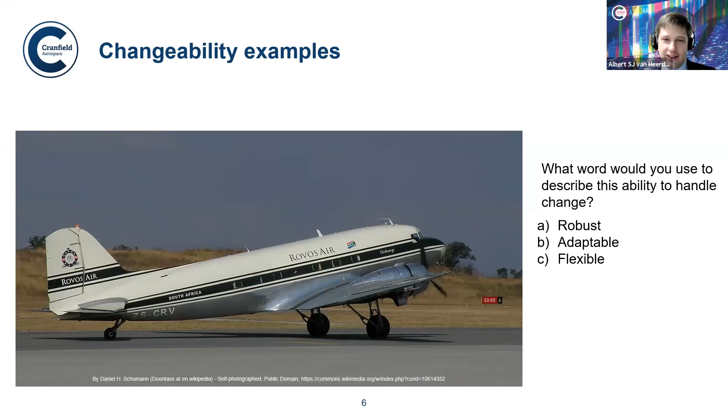Shall we say it's robust, adaptable, or flexible? I can see the numbers - adaptable looks like the preferable one. Well, you're all wrong. Actually, it's all of those terms - you can call it whatever you want. So you're actually all correct, I should put it rather that way.

A term we often use for this, where the aeroplane itself doesn't change or doesn't change much, is robust. It just absorbs changes as it goes on without being changed. There are very few examples of aircraft or engineering systems like this that just don't need to be changed, and this is simply because it's a well-designed, almost over-designed airplane that just simply does what it does, which is to transport things.

I'm going to go to the next changeability example. I'm going to use the words flexibility and adaptability a lot, just because, as I said, essentially you can use whatever words you want. Some words just naturally seem to fit the examples better than others.

So for example, you guys all chose adaptability - I would also probably have called it adaptable. In the literature we often refer to that as robust, but again, it wouldn't be consistent. But flexibility, most authors use when a change is made onto the system - from outside the system boundary, you make a change to the system. Whereas adaptability is more when the system changes itself. And robust is just, it doesn't need to change.

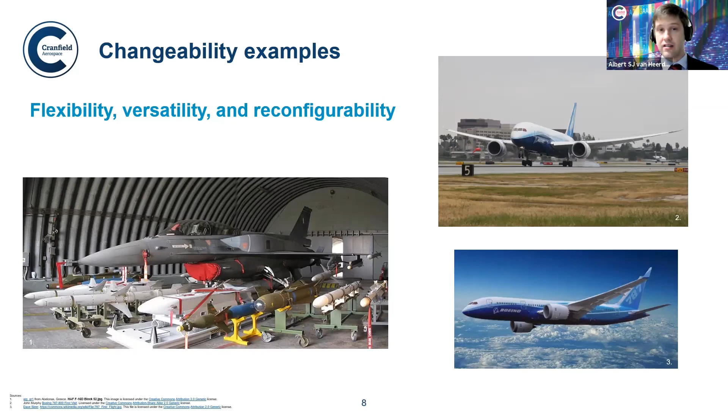Now, I often wouldn't consider this a life cycle property, because this has to do with the performance of the aircraft; it's something separate. For me, a life cycle property is usually something that has to do with what happens between missions. But many authors do consider that a life cycle property.

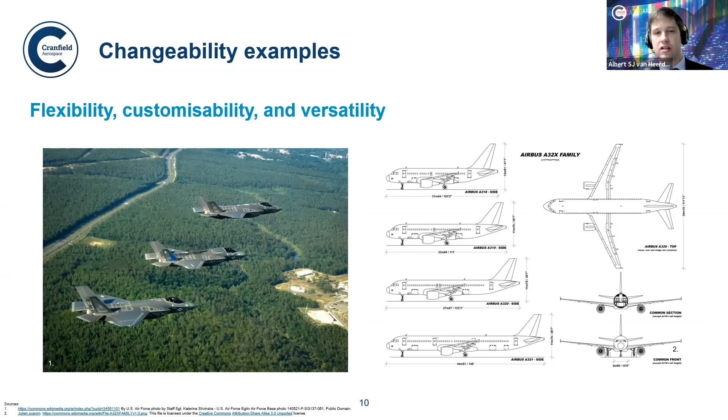This allows the Air Force or the services to keep maintenance costs and acquisition costs low, but still carry out these different types of missions or meet the different requirements of the forces. A very common example on the airliner side is what we call stretching the fuselage. You put in plugs to lengthen the fuselage. That's a common way of increasing payload, often at the expense of range, but not necessarily. I'll go into a bit more detail on that.

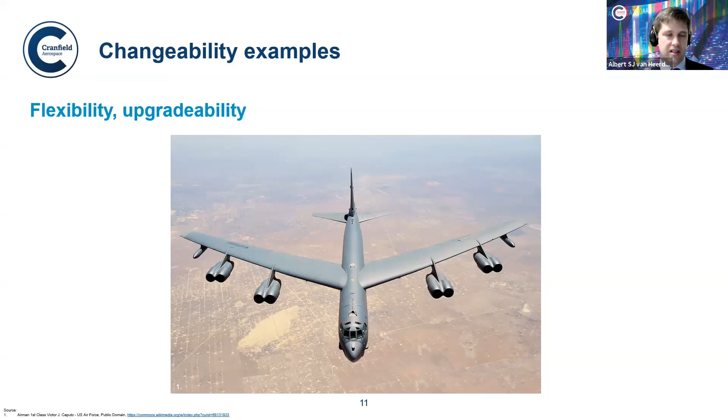Upgradability. A good example is the B-52 bomber, an aircraft that's been in service for a very long time, since the early 50s. It has seen extensive upgrades, not propulsion-wise, which is interesting, but in systems, the types of missions it can carry out, and the types of weapons it can carry. This is also a good example of over-design. The wing here is enormous, very high aspect ratio, very low wing loading, so a very large wing that allows all these changes to be made. You've got a lot of space and extra weight capacity that lets you make these changes.

Now I'm going to do another poll. If we've got pictures like this, the F-18 with different variants over time, and the Boeing 737 with different variants, and my little picture there, what word would you use to describe this ability to handle change? Now this is a trick question: is it adaptable, versatile, or evolvable?

Okay, it's spread pretty evenly. I shouldn't have said it's a trick question, I made it a trick question by saying it's a trick question. This is what we really refer to as evolvability, and the distinguishing factor is that there's this element of time, and the design that changes over time.

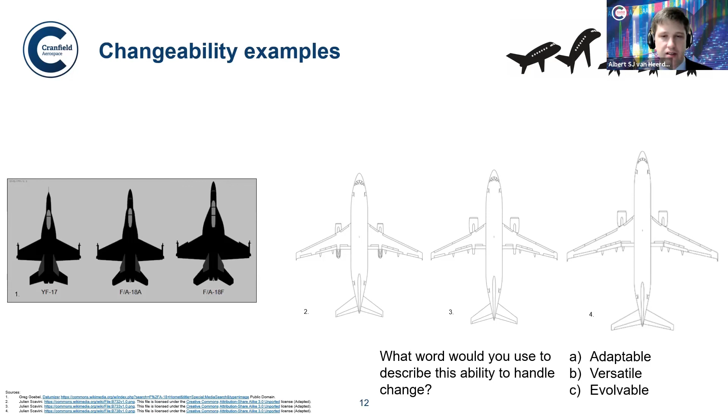I'm going to go into a bit more detail on how we recognize what we call evolvability. You wouldn't be wrong if you said the design was adaptable or versatile - it's just the language we use. People use it confusingly when they talk about it. I prefer the term evolvable because it's got some distinguishing features.

A definition for evolvability, this comes from a well-known MIT professor, Olivier de Weck, which defines evolvability as follows: it's the extent to which a design can be inherited and changed across generations or over time.

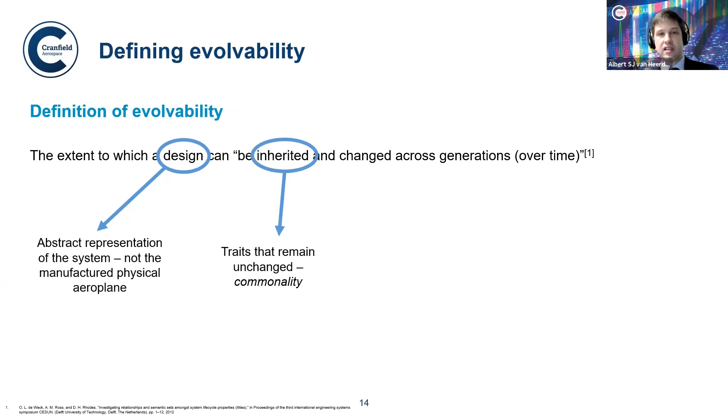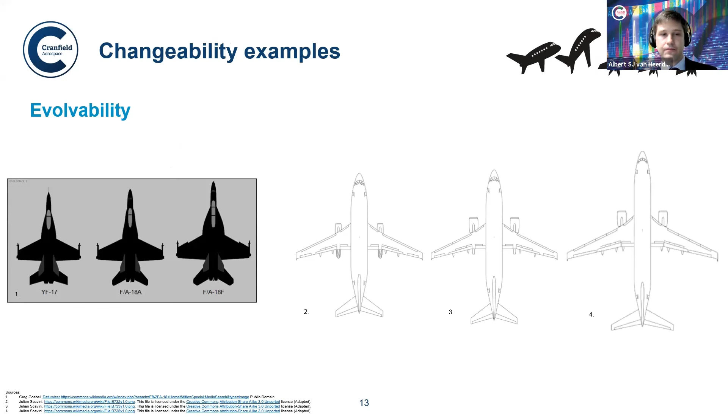Inherited means that there are traits that remain common across versions - certain things we see over and over again. If we look at this picture, you can see that they still look the same. They might be bigger or stretched, but there are things that are common. Inherit means that there are traits that continue far into the future, and with the Boeing 737, we still see traits that are essentially 60 years old, 80 years old.

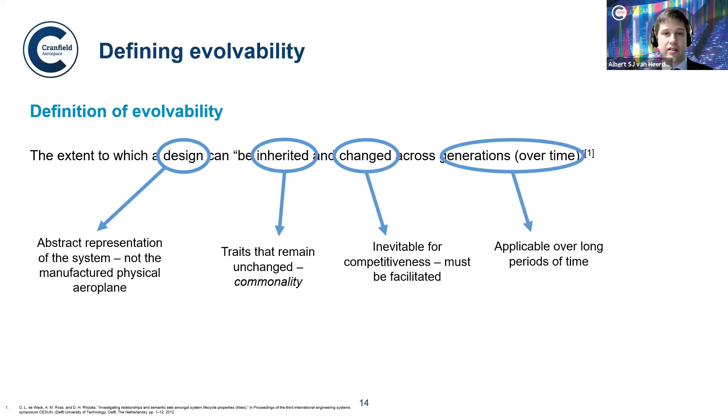Changed means that something about the design has changed, and it's going to be inevitable - you're going to have to change something about the aeroplane eventually, usually, to remain competitive. Generations, so usually this phenomenon occurs over very long periods of time. So that's the definition of evolvability.

There are a few obvious benefits. The first is that it's not a benefit, it's necessary - you're going to have to change your design whether you plan to or not. It's going to have to happen if you want to survive. How easy it is to change your design is going to depend on whether you survive as a company or not. It decreases risks if you have an evolvable design. It lowers development cost and time, but only for your derivatives, not for the initial one. It makes the manufacturer more nimble, able to respond more quickly to changes in the market.

And the airlines also benefit from this commonality that you get, so the traits that are common. Often we can reduce training and things for derivatives - for example, we can reduce pilot training and so forth.

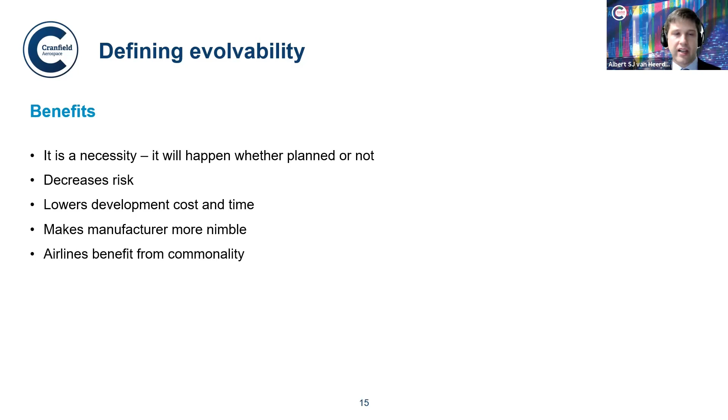But why is it difficult to design for evolvability? There are many, many reasons. The first major one is uncertainty - this is what we don't know. It's all about the future. The future is uncertain, we don't know where technology is going to go, we don't know how the socioeconomic environment is going to change, we don't know what the competitor is going to do. So we don't really know what changes we need to cater for. A very big part of designing for evolvability is to try to think about the most likely outcomes and then trying to prepare for those changes.

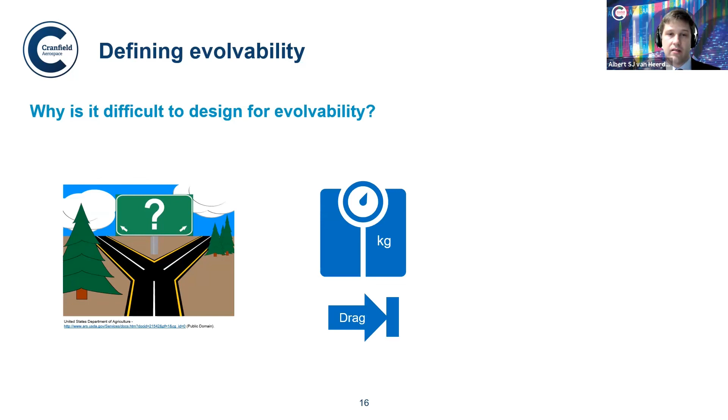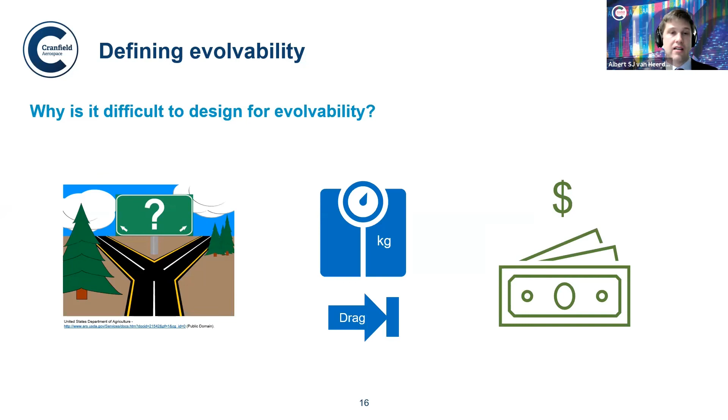The second one is that we've talked a bit about over-design, so having extra margin or what we call excess in the design, such as having a bigger wing. This adds mass and drag unnecessarily, which affects the performance and can affect the competitiveness of your aeroplane. Related to that, a larger aircraft is usually more expensive, or you could spend more money trying to reduce the mass and other things to make your design more evolvable.

I'm going to do a little demonstration to explain the thinking behind evolvability. I've got a two-axis graph here: utility versus cost. Utility is something that measures how good the design is - it combines a lot of factors usually. You could put fuel burn in there and noise, for example, NOx emissions. You can combine all of these things. You can even include passenger comfort or a lot of different things. So it measures how good your design is.

Cost here could again be anything - it could be your development cost, or it could be the total life cycle cost. The only important thing is that you shouldn't double account. So you shouldn't, for example, account for fuel burn as direct operating cost in the cost axis and also include fuel burn in the utility. You just need to be careful when you account for things.

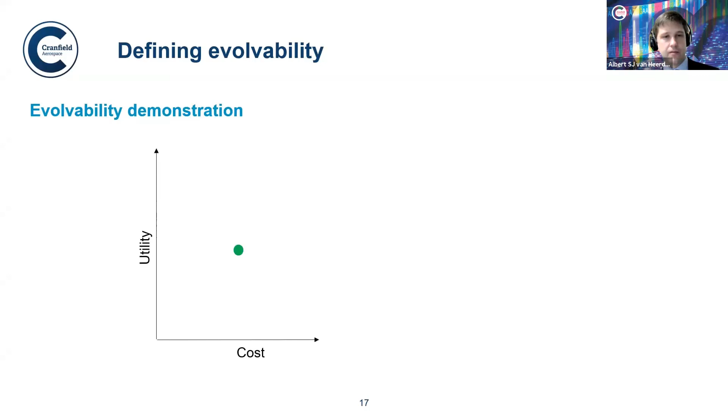A dot in this graph represents a single design - this design has some utility and some cost. You can think of this graph as a point in time, an era, or a scenario. We can then have a future scenario, which we'll call epoch 2 in this case. So we've got epoch 1 and epoch 2, and remember, you can have many different scenarios in the future, so you can have multiple epoch 2s.

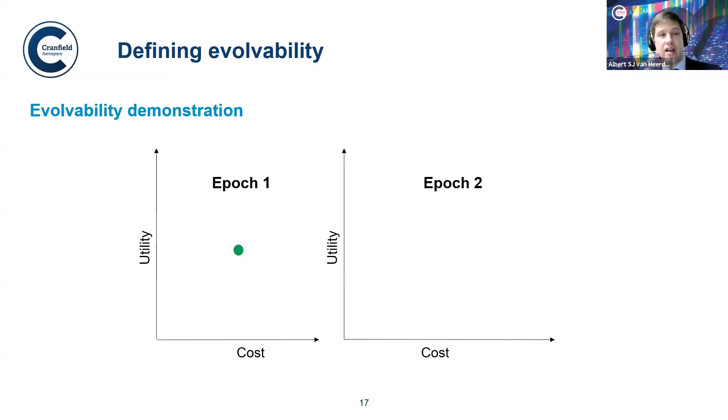Often when you design, your epoch 1 will be when the aircraft first enters into service, which could be 10 years from now, and then epoch 2 is beyond that. So you can have several scenarios for both epoch 1 and epoch 2. It's just important to keep that in mind.

So you've designed your little aeroplane and it's got some utility and cost, but then when you go to the future, you could completely reuse that design, so you don't do any redesign or changes. Now, probably the utility will be lower because it would be less efficient than new designs and so forth. It wouldn't be as competitive. However, it'd be cheap to do it because there's no extra development time or cost, and the only cost would be the recurring cost, which would be your manufacturing cost.

The other option is to design a new aeroplane, so completely new aircraft. This would have high utility, but also high cost because of the long development time and cost. The other option is then to take your aircraft and just make changes to it. So often you wouldn't quite be able to be as competitive as a brand new design, but there'll be less cost and time spent to develop it.

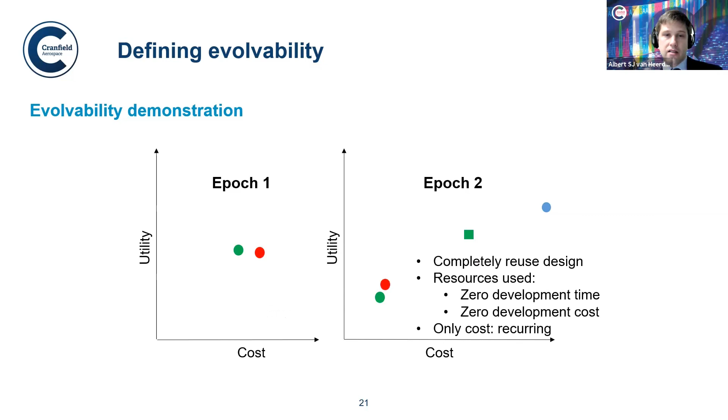Now, the idea with designing for evolvability is to design for change from the beginning, which will often come at a slight expense in utility and also more cost. So you could reuse that design as well, but what you would like to exploit now is that you've evolved that design at far lower cost.

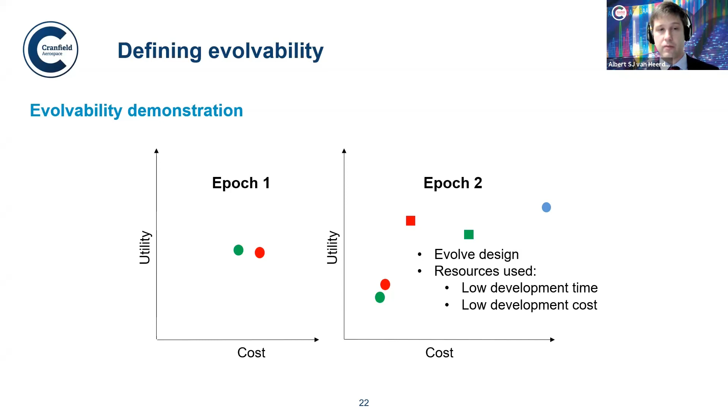Now, in the early days of civil jet transport, the green design was often the case. It wasn't really planned or wasn't planned extensively enough, whereas nowadays evolvability is planned quite extensively, and my work is very much about helping that process, helping designers to do it faster. So I'm going to go quickly through a few examples of evolvability in aircraft.

So I talked about the 367-80. This was an aircraft that Boeing built primarily for the purpose to test ideas for jet transport. And it eventually developed into the KC-135, which you also think of as a Boeing 707, but it's actually a different aircraft. And then the Boeing 707.

Now, from the -80, the fuselage diameter increased for the KC-135 and again for the Boeing 707. Boeing didn't want to make this change, but in response to McDonnell Douglas, which introduced 6 abreast seating, they had to be competitive. The 707 also received extensive upgrades to its wing in very quick succession. So there were many variants, and it was a design that evolved very quickly and a lot. And eventually, some of the design features went on to the Boeing 727.

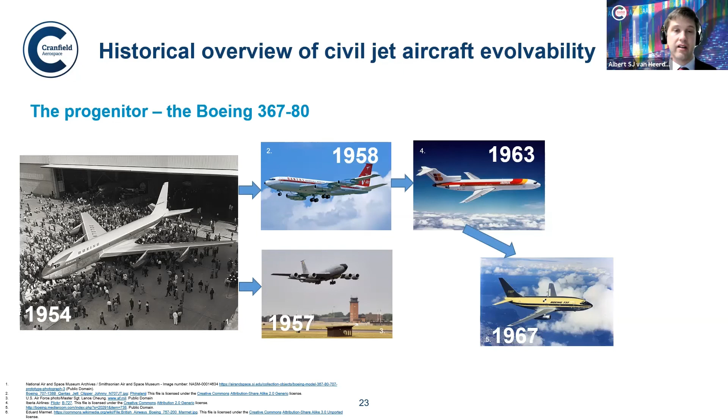So there are actually a top cross-section and a bottom cross-section when you look at the fuselage. And on the 727, the top section was reused, whereas the bottom section was made smaller. The 727 eventually, design segments from that were used on the 737, which itself is going to be the next slide, which received extensive evolution. The 727, actually exactly the same fuselage cross-section, was also used on the Boeing 757.

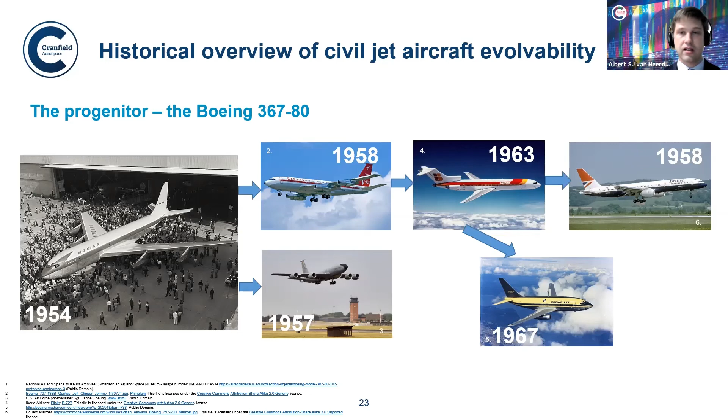So the Boeing 737 is an interesting example because it started off with low bypass turbofans. So you can see the engine there, the nacelle has got a very small diameter. When new technology became available with the CFM56 engine, the high bypass ratio, or what we call medium bypass ratio, the larger fan diameter, there was a big problem with landing gear space.

And changing the landing gear essentially means changing the wing. And changing the wing for an aircraft is essentially a redesign. It's a very significant design exercise to make changes to the wing. So with this next generation of 737, what's called now the Classic, the original was called the Original, and then we went to the Classic.

What they had to do was put the engine further forward and upwards, and that actually was only made possible by the advent of computational fluid dynamics, and extensive study to make that change happen without changing the landing gear. Then we went to the next generation, the 737NG.

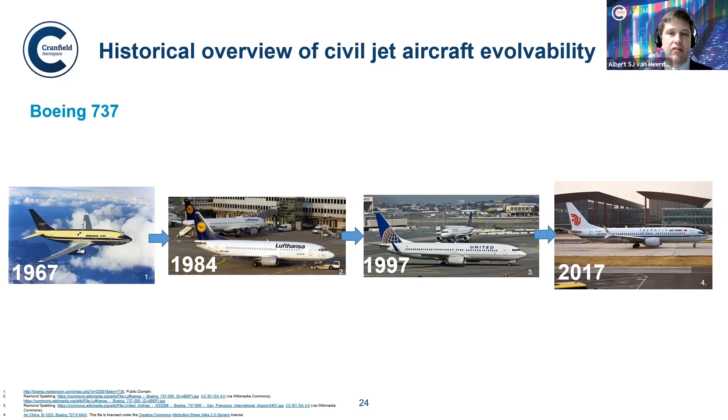Then we went on to the MAX, which with the LEAP engine is again a bigger engine. So again, a big challenge in integrating that with the airframe. And actually for the longer versions of the MAX, there's a mechanism in the landing gear which effectively increases your landing gear length during takeoff to allow you to still rotate.

Probably the best example of an aircraft that was designed with evolvability very much in mind is the Airbus A300, the original Airbus. This aircraft was designed with excess volume, so you could increase the range significantly, ample wing area and landing gear length. The landing gear length was so long that you could increase passenger capacity by 25% without changing anything about the landing gear.

The airframe was also designed such that you could increase the maximum takeoff weight significantly with only minor structural changes. In fact, the aircraft's range went from 1,200 nautical miles, I think, up to 4,400 nautical miles without any major noticeable geometric changes to the wing. And the maximum takeoff weight went from, I think, 130 tons to almost 170 tons. So a very, very amazingly evolvable aircraft.

Another thing I should say is that many versions were studied from the outset. Even before the aircraft was introduced into service or manufactured, many derivatives were studied. One of these was the B10, which later became the Airbus A310, which is actually a shortened version. The interesting thing about this aircraft is that the wing chord was reduced.

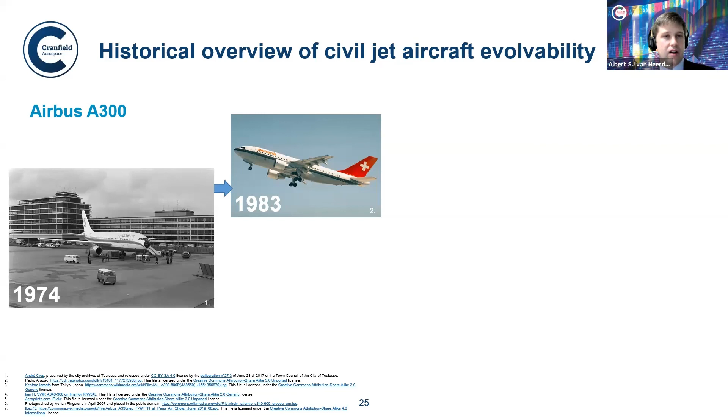They could therefore use the same structural layout and many of the same structural characteristics, but the aerodynamics was completely new. And it also took some new understanding of transonic aerodynamics to make that possible. It's the only example that I can find where a wing was shrunk like this. It's a very, very interesting example.

These collectively changed into the Airbus A300-600, which was the last, highest gross mass variant of the Airbus with a very long range. So essentially a completely different aircraft from the original, but looking almost exactly the same. These designs were changed into the A340 and A330. The A340 design was eventually upgraded to the A340-600, which has an extended wing.

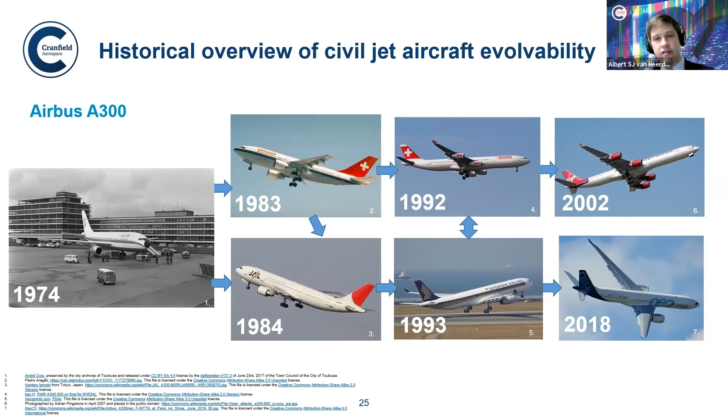The wing chord was increased with a wedge increase and a tip. This is a very extensive redesign exercise, although it's not a new wing. The decision was made that changing the existing wing is better than incurring the cost of a brand new wing, even though it might be less efficient. And of course Airbus had so much confidence in the A330 design that it received new engines in the A330neo, plus changes to the wing.

Arturo, I don't have the time displayed on my computer. I don't think we've got that much time left. Yeah, about 15 minutes left.

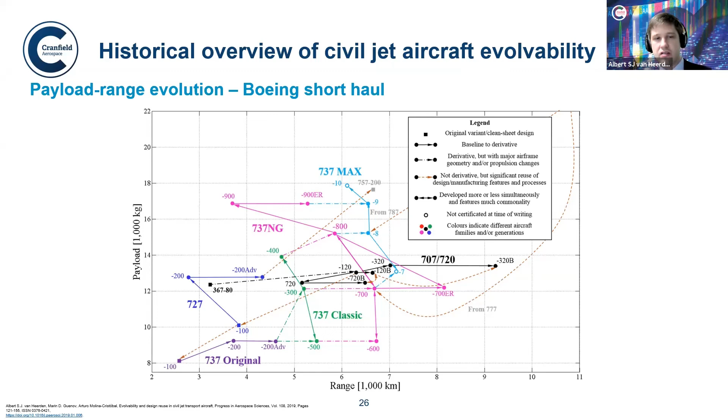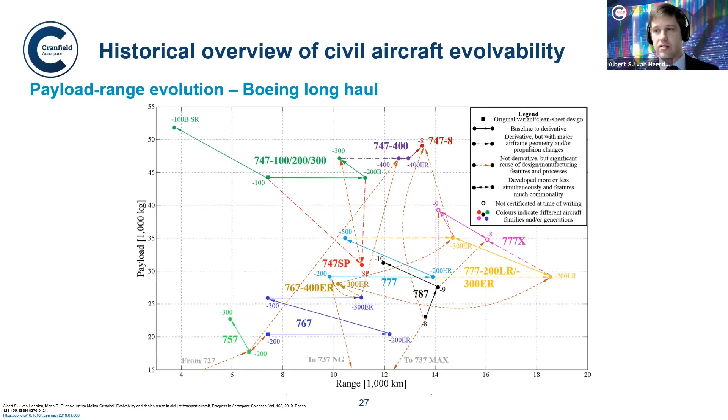They introduce a version, then make it more efficient to extend the range but keep the payload the same, and then stretch it with the same new technologies. Once they've got that, they try to increase efficiency again to extend the range of the larger version. This was done extensively with the 777 as well, which went up to the 300ER version. They extended that as far as they could, but eventually had to make major changes with the 777X, which has a new wing design.

Airbus follows a more typical leap and branch version. With the A300 you can see the extensive increase in range without a big increase in payload.

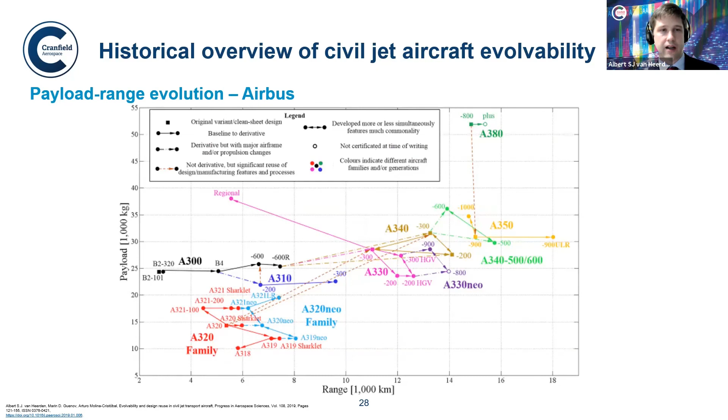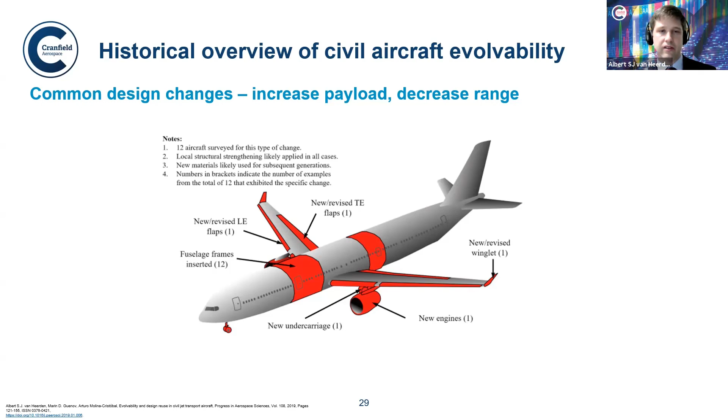Now, how does this physically look? So if you want to increase payload, decrease range, these are images that I produced based on a survey of several aircraft and what the most common changes are. So obviously, as you would expect, you increase the fuselage length by adding plugs. Sometimes new engines, but not always. And sometimes with heavier versions, you fiddle a bit with the high lift devices.

If you want to maintain payload and increase range, sometimes you're going to have to increase the wing area. That's for wing loading, but also to have more volume for fuel. And often extra fuel tanks are added in the fuselage to increase the range. Sometimes wingtip extensions and so forth you see as well.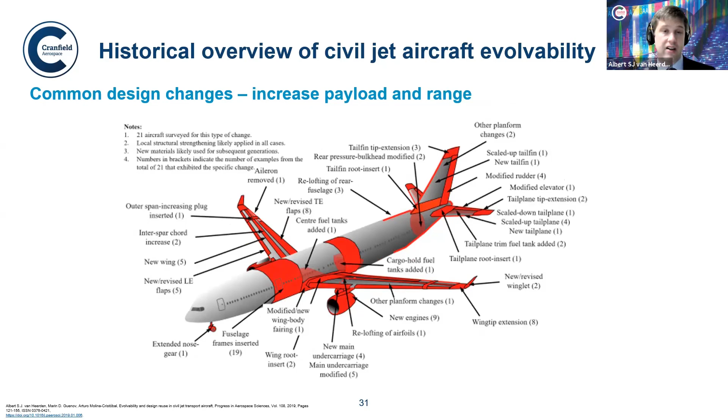If you want to increase both payload and range, you're going to stretch and you're going to probably increase the wing, but not necessarily, as we see could be achieved if you've designed with enough margin from the beginning.

A more rare example is decreasing the payload, which we saw with the A310, and increasing range. This is often a more difficult change to do if you want to do it well, because you want to decrease the wing area essentially. And that's very expensive to do. So it's often a more difficult thing to do. You're also going to usually increase your stabilizers for stability purposes.

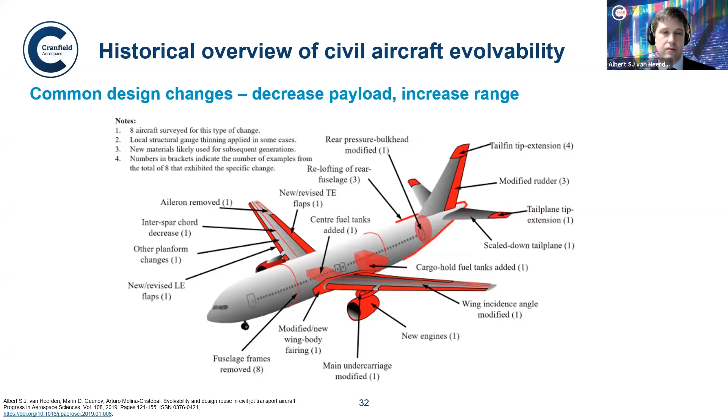So what are the lessons we can learn from these? It's important to have some sort of a strategy. So it's important to plan for evolvability. So either the leap and branch or Z or some other strategy. Leave margin in the volume, wing area, landing gear length and strength. This is very important, but it's very difficult to decide how much.

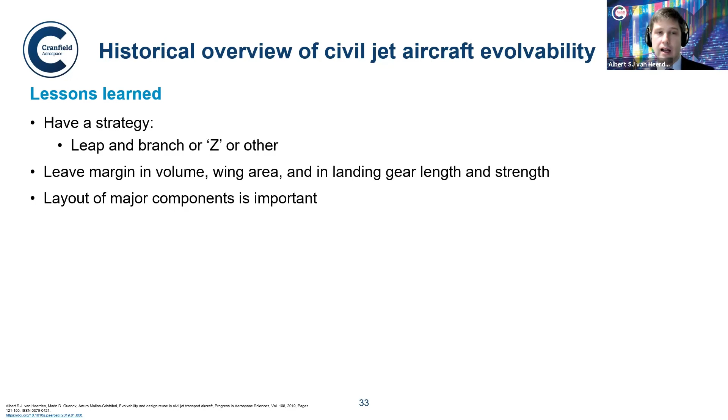The layout of the major components is important. So having engines under the wing allows you to more easily stretch the fuselage than having them at the back with the tail. There are several reasons for that. So the tube and wing plus podded engines under the wing is better.

Structural strengthening is reasonably easy compared to big changes in geometry, especially with the wing. And smaller derivatives are usually more difficult to change. And there are also multiple ways of achieving a change. So you don't necessarily have to stretch the fuselage. You can internally change bulkhead spaces, but you have to have prepared for that change.

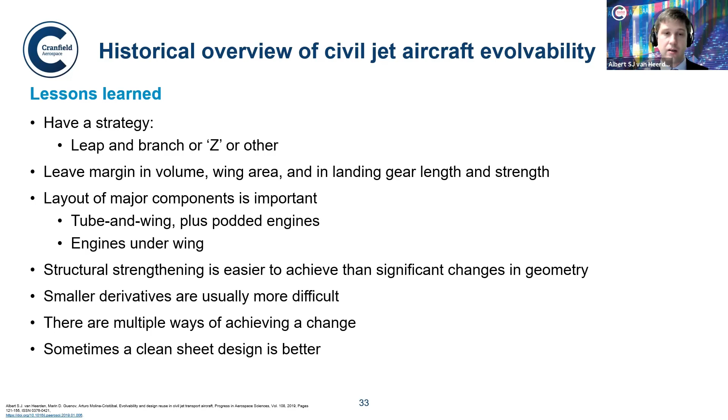Sometimes a clean sheet design is just better. So it's not necessarily that you should evolve an existing design. You should study also whether a new one is going to be better. Now, I quickly want to go through the evolvability framework, and I think we're going to run out of time now.

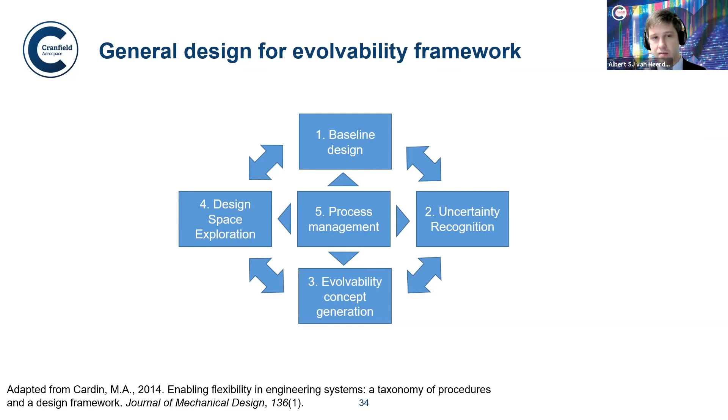This is a process which I adapted from Michel Cardin, who was actually at the National University of Singapore for a while. He studied flexibility of engineering systems in general in quite a bit of detail. What you have is a baseline design. So you have to start with something. Then you account for uncertainty by doing scenario studies and so forth. You generate concepts for evolvability and do design space exploration. I'm going to go through these steps very briefly.

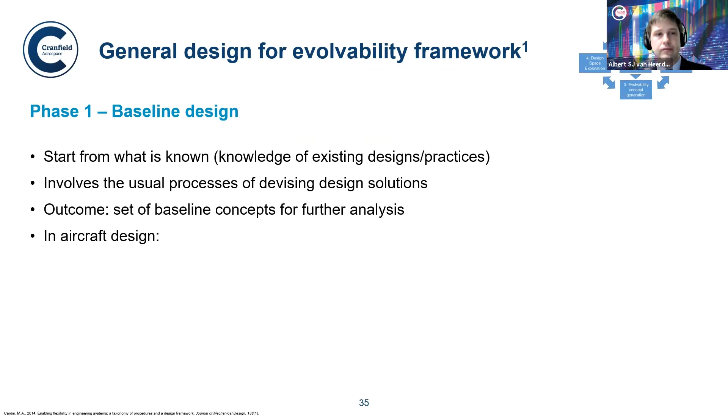So with the baseline design, you design essentially for your current requirements. And it's the normal process we learn in aircraft design. With uncertainty recognition, you want to capture and quantify the effects of the changing world on the system over time. So the questions you want to ask are, who are the stakeholders and how will their needs change? How will the changing world change requirements? What technologies will become available in the future and which ones should you prioritize? And what will the competition do?

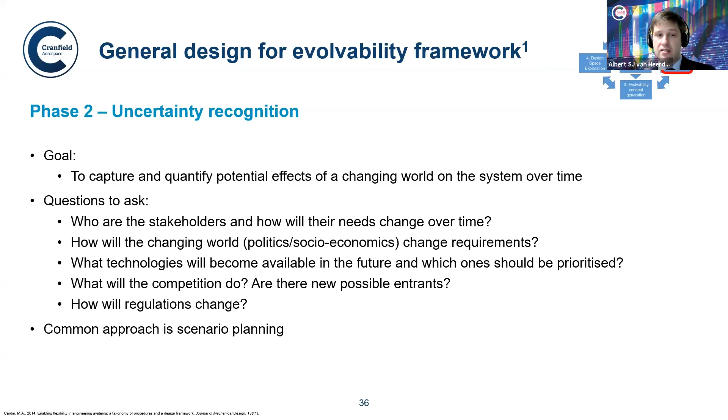A common approach in aerospace is to do scenario planning. So you identify a few scenarios that you're going to get in the future. Once you get to the concept generation, there are two aspects of it: strategy generation and the actual enabler. So what's going to enable the changes to be made?

Strategy is about who will make the change: would it be the airframer, or the airline could do it in service, but usually it's about changing the design. When will it be performed and in response to what changes? And then which enabler would be used. So a common technique is what we call real options. This is a financial evaluation of each strategy.

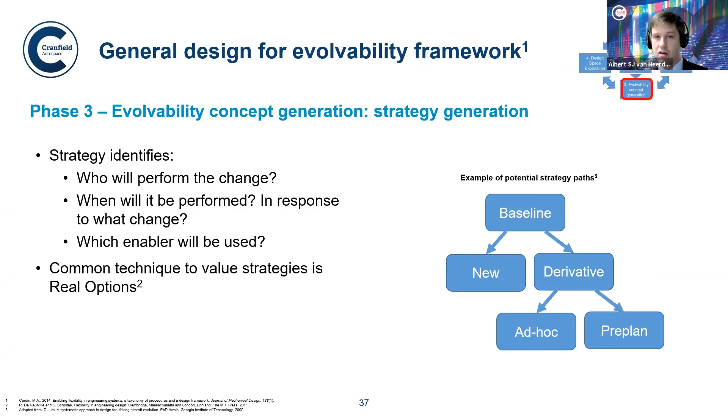So just a simple example is you've got a baseline, then you can have all these options, either new, derivative, and will the derivative be planned or ad hoc? And you study all of these even before the aircraft goes into service. I'm going to skip this one. It goes into quite a lot of detail. I want to go to some of the enablers. These are intuitive things, and this is what I would like you guys to take home.

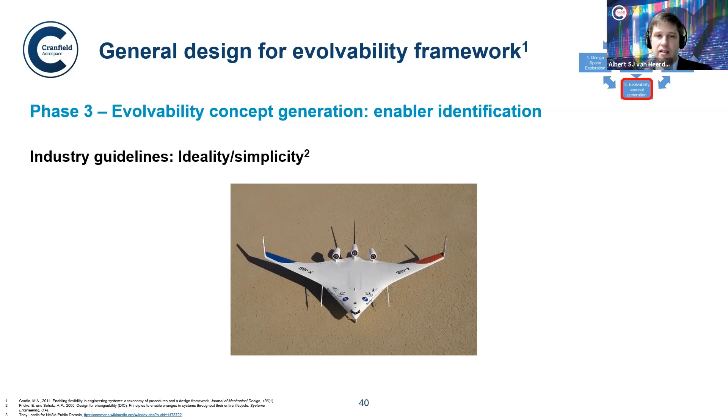First of all, try to design as simple as you can. That means fewer components, minimize the number of interfaces between components, and minimize the number of secondary functions that each component does, and use already existing resources. This just limits the number of components that can change. So it's a very simple thing - try to keep your design as simple as possible.

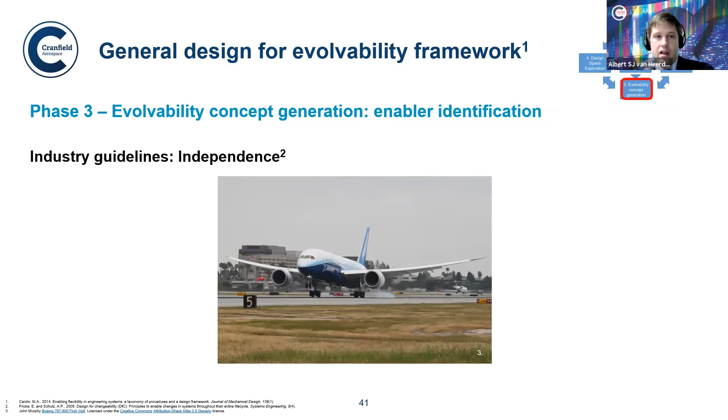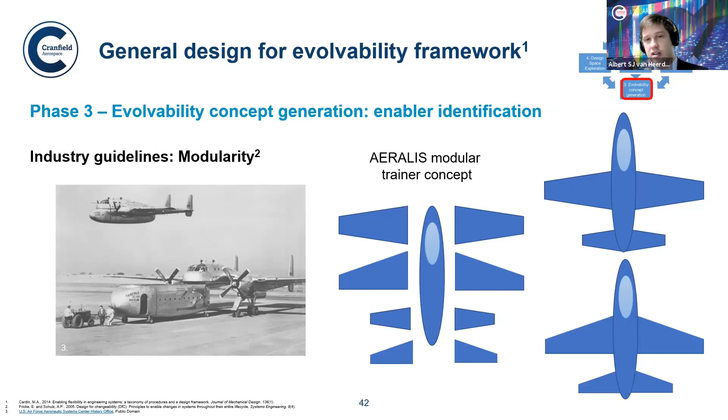The second is what we call independence, and this is by ensuring that design parameters are as decoupled as possible, so that if you change one design parameter, it won't affect any other design parameters downstream. A related concept is modularity, and this is probably the most intuitive enabler - this is where you cluster different components that have different functions into physical modules. Some extreme examples, like you can see, there is a removable cargo pod here on the left, and this concept for a modular military trainer where you can change the wings, and this is in service where you change between a low speed initial trainer and a high speed trainer.

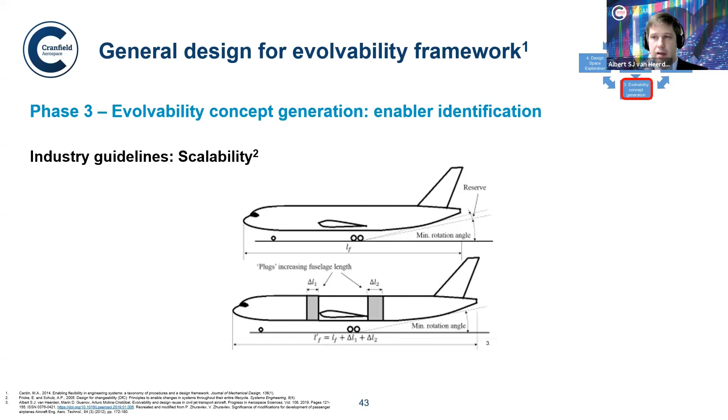Scalability is the ability to scale. So the next enabler is very much related to this. Scalability is essentially, for example, to increase the fuselage length, and you need a few things to be able to do that - what we call redundancy or excess or margin. So this is extra wing area, again, like we showed in the Boeing, the Airbus A300, and extra landing gear. The image in the middle here is the DC-8, which has really long landing gear, and that enabled them to stretch the fuselage up to the one that we can see there on the right-hand side.

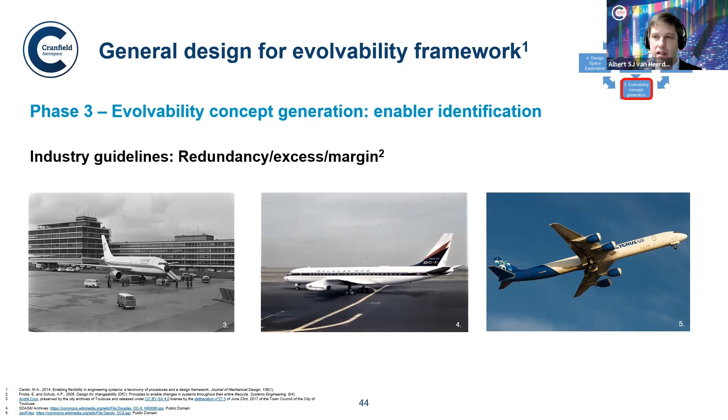Design space exploration is the computational side of things - we've got millions of designs to study. So these concepts are simple, have excess, do modularity and things, but it becomes difficult when we've got many thousands of designs that we need to study. And this is really where my PhD came in.

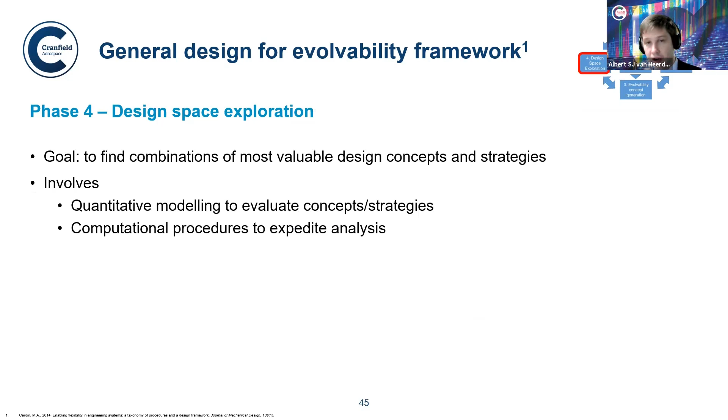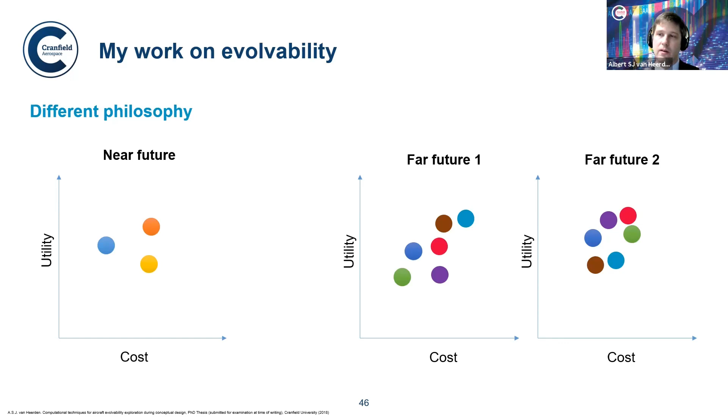I'll go briefly through an example of how it works. In my case, I look at pre-planned derivatives, so I look at what we call the near future - this is when the aircraft will go into service the first time, so 10 years from now, for example, and then beyond that, 20 years from now. What I do is I design aircraft for both the near future and the far future, and then I need to find commonality between them. I could design ones now and then take for every baseline, do derivatives, but you can see that that's going to explode computationally. So I'd rather have a group of designs in the future and a small group of designs in the near future, and then find commonality - essentially work backwards. To do that, you need some sort of a way to predict commonality.

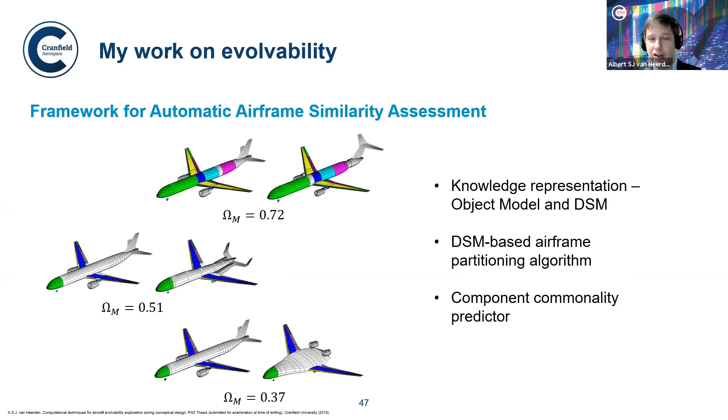So I developed a method which is a type of artificial intelligence that's used in DNA sequencing and so forth to catch common features across things. This is going to be a whole lecture in itself, so I'm not going to go into detail, but essentially it allows you to identify commonality between airframes. So for example, in the near future, I can select a design, the blue design, and then I can see how the far future designs' cost will reduce based on commonality. You can see some reduce more than others and some less. I can choose another design and see that the designs change in the far future. Another way is to select a design and then see what the level of commonality is, or you can select one in the far future and see what's the commonality in the near future, and so forth. So this allows you to explore.

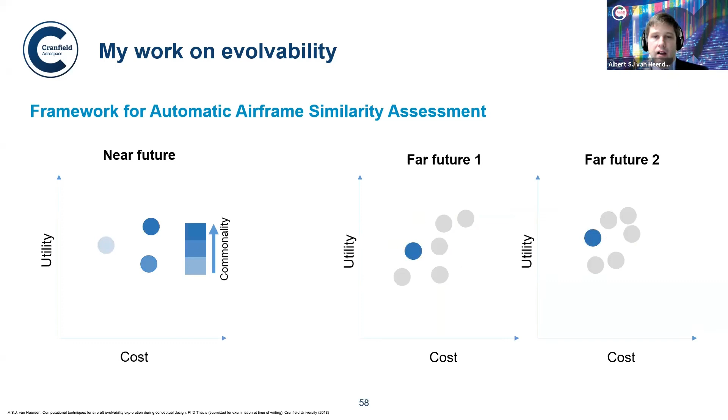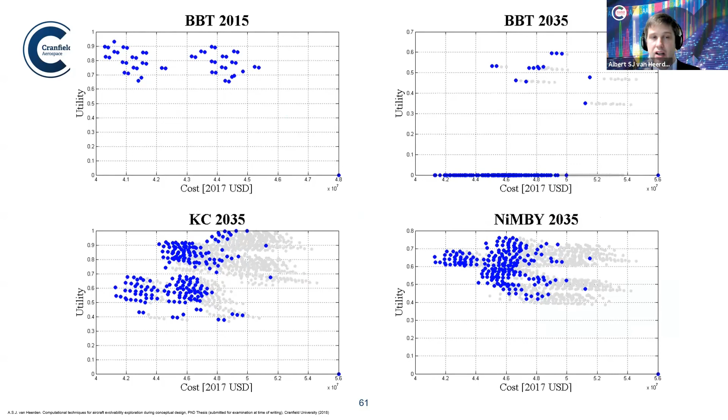Another technique I was developing was a filtering technique for reducing the number of options. This was just a technique that looks at different criteria and commonality to reduce the number of the future options.

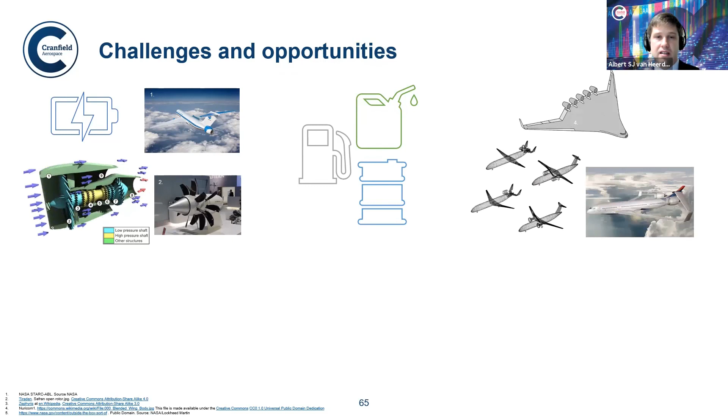Concepts is a difficult one. As I explained, the tube and wing, there's a reason why it's so common, because it works. It works really well. So designing new concepts to be more aerodynamically efficient is a challenge.

And then the design process. So big challenges in enabling us to study all these things, study changeability. And this is really where my work comes in on the computational side to allow us to study this in detail. So a well-designed aircraft is evolvable.

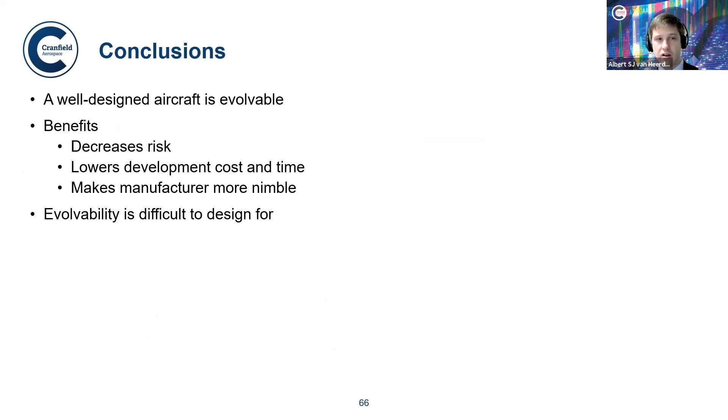It's got many benefits like decreasing risk and lowering cost and time. It's difficult to design for because the future is uncertain. Therefore, study the future, follow a strategy, and incorporate the changeability enablers and compute.

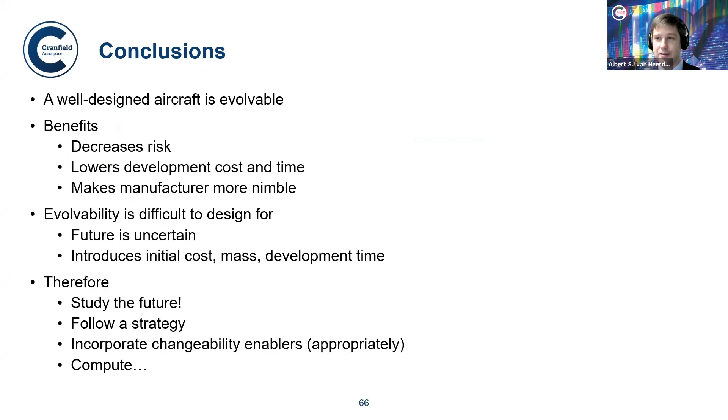And I'm going to leave you with this quote from Darwin. It's not the strongest of the species that survives, nor the most intelligent. It's the one that's most adaptable to change. And I think with aircraft, it's the same.